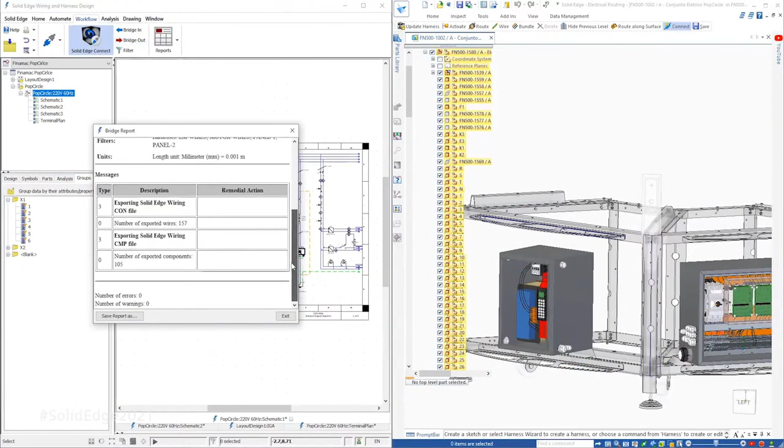Electrical design: enable fast, accurate 2D layout of industrial control panels with new cabinet design capabilities.

Simulation: optimize and validate designs with tighter integration between flow and structural simulation.

Manufacturing: speed up NC programming with a searchable post-processor database, new fast roughing, and adaptive milling.

Technical publications: produce high-quality documents and illustrations faster and directly from your 3D models.

Data management: take control of your data, saving time and money with rapid concept modeling and shape search capabilities. Cloud-based collaboration: harness the cloud to edit and share CAD files and much more.

And there's so much more. Our beta customers are calling this the best Solid Edge release in years. We can't wait to share all of the details with you, so get ready to experience Solid Edge 2021.

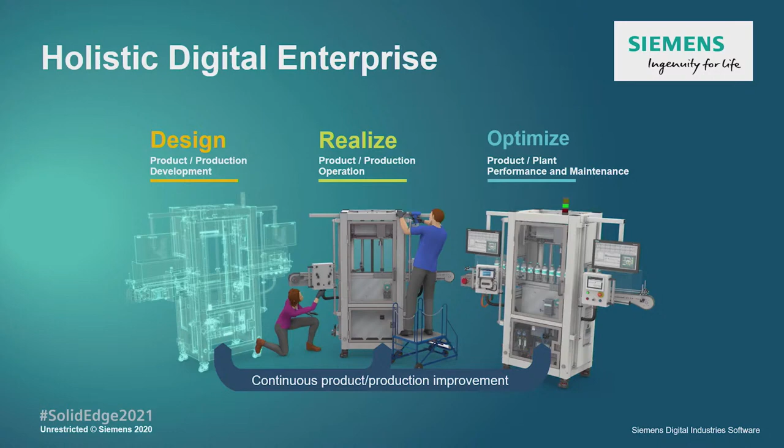But what's happening is that these worlds are collapsing. Design, manufacture, optimizing, it's all pulling tightly together. So you have to think of the digital twin not so much as just a CAD digital twin, but also a manufacturing digital twin, taking data from the field in a tight closed loop and bringing it back to design and manufacture to make your products better.

And this starts with Xcelerator. Design, realize, optimize, whether it's electronics, mechanical, collaborating with others, simulation, IoT, operations, it's all there for you.

And it starts with the Solid Edge portfolio. So it's very important to understand that Solid Edge is so much more than a CAD system. Sure, it has the best mechanical design in the marketplace, but what about the rest of the things that you need to do as a business?

Electrical design, simulation, manufacturing, all part of the Solid Edge portfolio. Technical publications, data management, regardless of how small or how large you are, and now also cloud-based collaboration as well.

And I'm really pleased to announce that we're bringing this not only to commercial customers, but also to students and startups. So the full portfolio of Solid Edge is available to both of these constituencies. Rather than being just MCAD, we have the ability to have MCAD, electronics, technical publications, all available completely free for students and for startups.

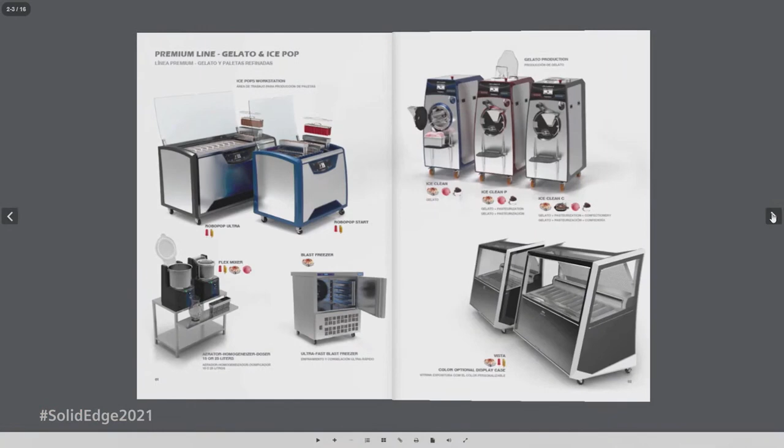If we take a look through their catalog, we can see all sorts of things: ice cream making machines, popsicle making machines, chocolate display cases, ice pop machines, mixture prep, all beautiful designs. The most amazing thing about this to me, however, is that none of this is real, what you're seeing. This is all digital twins. Every picture you see here is straight from Solid Edge, rendered, and into their catalog. So you're really seeing the full realization of the digital twin here with Finamac.

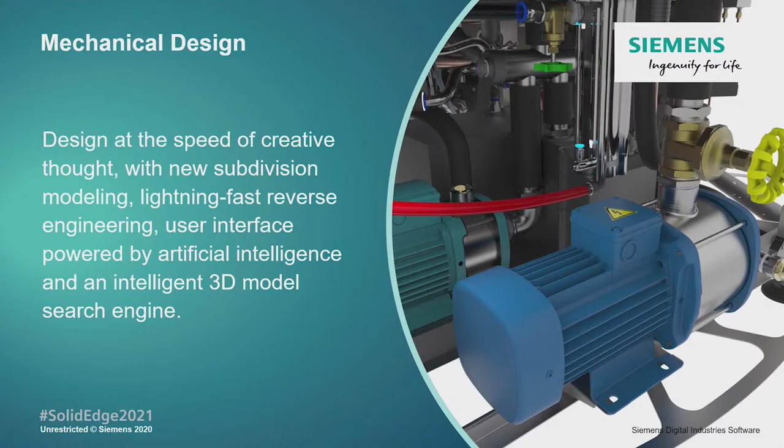So let's start with mechanical design, the core of what you do. New subdivision modeling techniques, very fast reverse engineering, and some new artificial intelligence capability I think you'll really like. Also an intelligent 3D model search engine. Quite a lot to see here just in this first section. So let's go through them one by one.

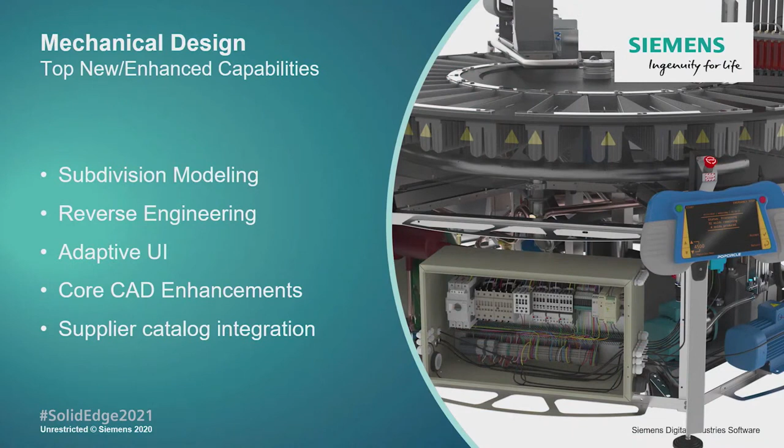Subdivision modeling, reverse engineering, adaptive UI, core CAD, the stuff you do daily, and supplier catalog integration. These are just a few of the things that we're highlighting today. There's a ton of new stuff in Solid Edge 2021 that I think you'll really enjoy, and it'll be really productive for your company.

Let's start with subdivision modeling. This is an amazing technology that allows anyone to create beautiful shapes. In the past, this was really the domain of a specialist—NURBS and surfacing and all these complicated things. Now anyone can create beautiful shapes.

Let's take a look at that with Oliver. Thanks, Dan. So let's jump into the Finamac machine and take a look at subdivision modeling. Here what we're going to do is design the portable controller. As Dan said, subdivision modeling is all about enabling you to develop distinctive organic shaped products, but without the need for expert knowledge. So if you're not the best at surface modeling, for example, here's your chance to shine. We'll start here with industrial design sketches as a guide, and subdivision modeling can be simplified to three steps.

The initial shape, a control cage to push and pull, and then blend options. We started here with a box shape and pushed out the lower portion using the control cage. A split operation can be used to subdivide the control cage, which in turn gives more control over the shape of the body. And the control cage can then be adjusted.

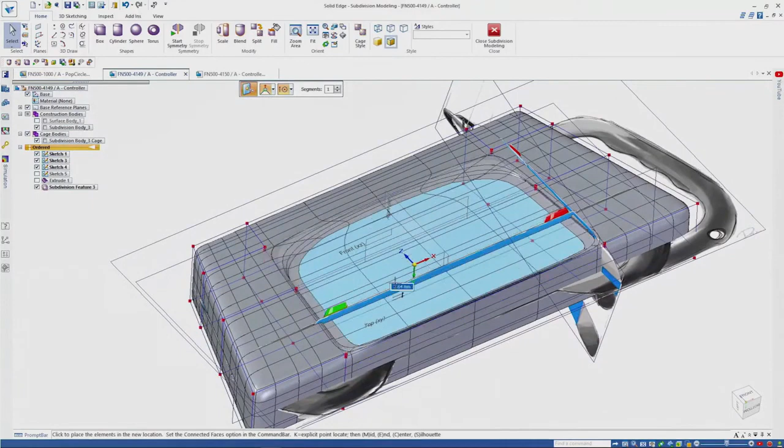Here we can accommodate room for the central area where we need the controller screen. A simple lift operation adds the necessary faces to the model. And then, importantly, this blend function can be used to control how sharp or smooth certain edges are.

While many expect to see only smooth blend options, that's not the case in Solid Edge. Here you can choose sharp blends wherever you like. Then to create the cutout for the screen, a series of similar push and pull techniques can be used to easily get the desired result.

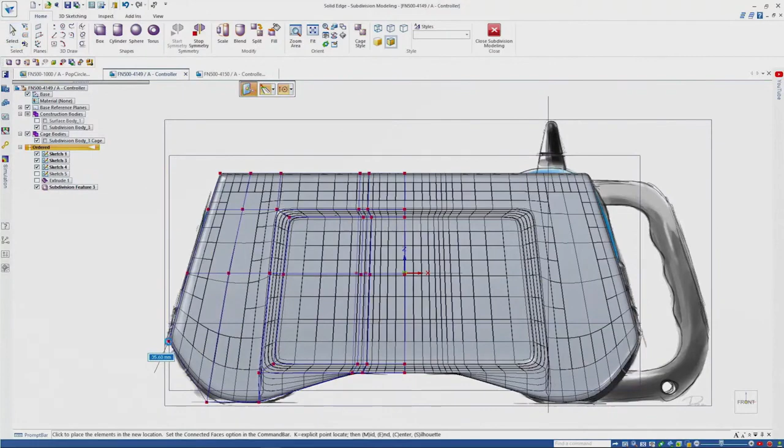Now, many parts are designed symmetrically, especially in the consumer space. To achieve this, we can simply define the symmetry plane, then any edits made on one side of the cage are reflected on the opposite side, as you can see here. And those of you who use synchronous technology in Solid Edge will be familiar with the steering wheel, and it's equally at home here to manipulate this organic shape.

For the notch at the top of the part, a simple move face operation creates the geometry that we need here. And to help keep track of what edges we've blended, the value of each of those blends can be shown at any time for every edge and vertex. That's shown here.

Now we need to create the handle on the right-hand side of the Fealinx controller. I'm not going to cheat here by pulling out something pre-created. We're going to do this live just to see how easy yet powerful this technology is.

Same as before, grab an initial shape. Here we'll extend its form and then use the control cage to push and pull into shape, followed by some blend control, of course, for the finger grips.

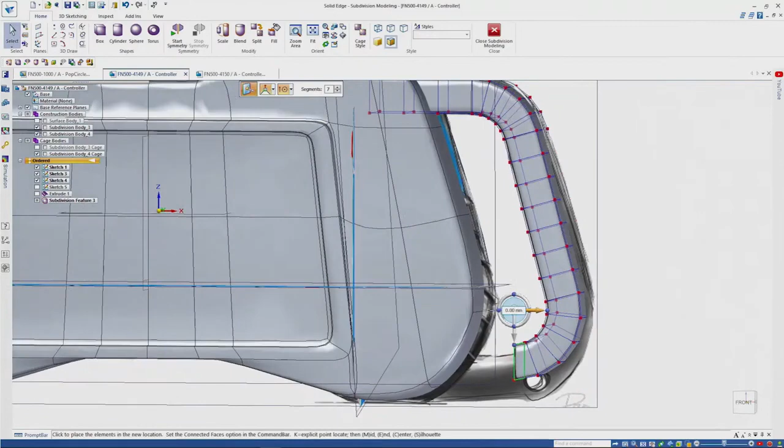Nice and easy, done. Importantly, traditional solid and surface modeling techniques can be integrated with subdivision modeling. Here we can use an existing surface to split the subdivision geometry and then thicken the result to create the raised portion of the handle. And of course you can go on to add further details using more traditional modeling methods. But just look how easy that was.

Something that would have taken traditionally hours, if not days. But here in Solid Edge 2021, we're talking minutes.

Back to you, Dan. Thanks, Ollie. I tell you, I've been around the industry a long time, and I've seen what it takes to do that kind of modeling—literally days to do a type of model like that. And to see that done so quickly live in front of us, it's really, truly amazing, even to an industry veteran like me.

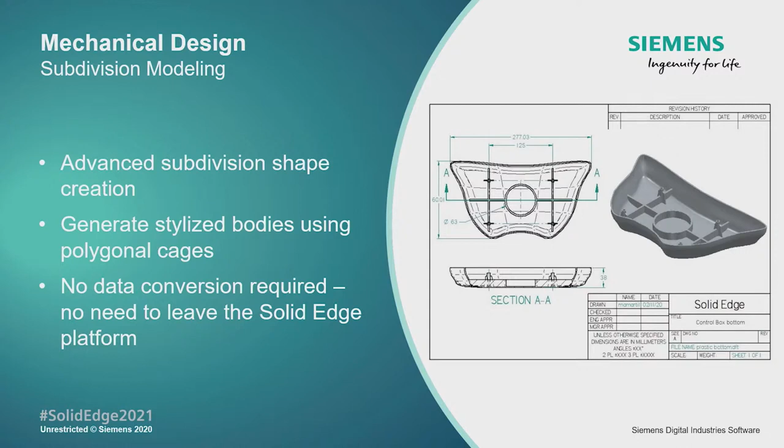So what you see is it's really easy to create those shapes, right? And you use the polygonal cage. It takes a little bit to get the hang of it, but once you get the hang of it, it goes really, really fast. The great thing about it is it's right in Solid Edge. It's built in. There's no specialized tools, no other products to buy. Available to you in Solid Edge 2021.

We're seeing some great feedback from customers around this. For example, Jason English at Ditch Witch. Ditch Witch, of course, makes earth-moving equipment and ditch digging equipment. But they are bringing more and more stylized shapes. They want to see what their industrial designers can do with a new technology like this. I'm excited to see as well.

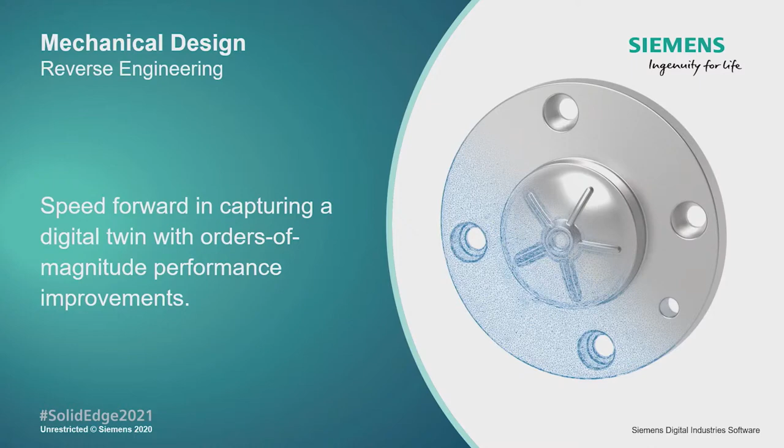Next up is reverse engineering. We introduced reverse engineering a couple years ago, and we've been continuing to invest in it, making it faster, adding new features to it. I think you'll be really pleased with what we have in Solid Edge 2021. Let's take a look with Ollie.

Yeah, thanks Dan. So we'll jump back into Solid Edge 2021 and take a look at one of the recent additions to Solid Edge's reverse engineering toolset, deviation analysis. This allows you to measure the accuracy between an original scan and the resulting reverse engineered model, or even compare scans. The result plot color codes deviation for easy interpretation. Red means our test body exceeds the reference body, and dark blue depicts negative distances. On-screen callouts identify minimum and maximum deviation, and you can copy and paste any of the data for later reporting. Settings such as deviation range and result decimal places can be adjusted at any time, taking just seconds for the model to recompute. Back to you, Dan.

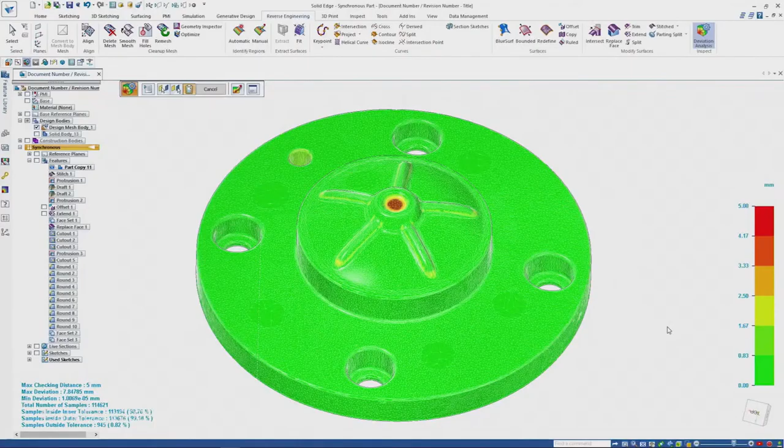All right, thanks Ollie. Some great new capability there in reverse engineering. Of course, the deviation analysis, really those models that you're taking from the real world and creating a physical digital twin, how far do they deviate from the real world product? Easy to tell with deviation analysis. And importantly, it's really fast now. So things that used to take minutes now take seconds.

Next up is adaptive UI. This is a great new technology I'm really excited to bring to you guys. It uses artificial intelligence to predict what you'll do next. How does it do that? Well, it looks at what you've been doing in the past, and it looks at your patterns, and then it figures out what you might do next and presents those options to you. It's really groundbreaking stuff, so let's take a look.

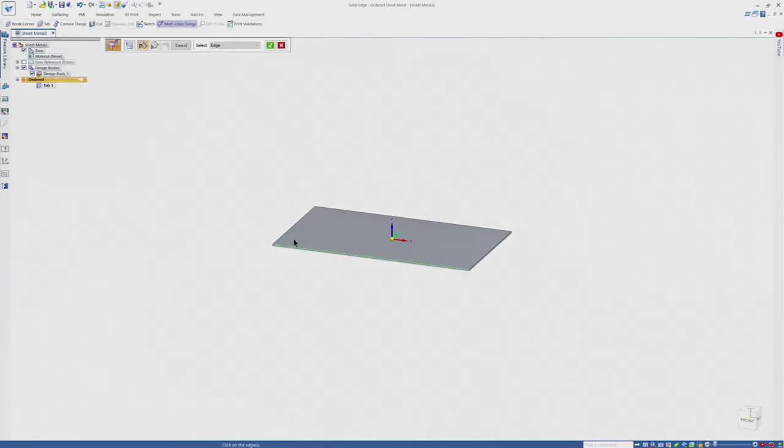Very cool indeed. So let's jump into Solid Edge once more. And what you need to do here is keep your eyes on the top left of the screen. Solid Edge 2021 includes an artificial intelligence-based assistant in the user interface up here to predict the next commands you need based on what it is you're doing and where you are in a design. So for the Fealinx machine, there's lots of sheet metal work, and Solid Edge 2021 has learned that from the design engineer, and rather than presenting tools that are commonly used across the industry, which would be good, it's presenting tools commonly used to the individual, which is excellent.

That's right, Solid Edge 2021 is now individually tailored to you, and what's more, it will continue to learn from you and dynamically improve how it holds your hand through your day-to-day work. And it's really interesting to watch, dynamically presenting the next selection of tools, even across environments, as we go from sheet metal to sketch and back, presenting those specific commands. And I said at the start to keep your eyes at the top left of the screen. Notice that it's just one toolbar. This means you can remove the other toolbars to maximize your workspace. You have what you need right here, ready when you are.

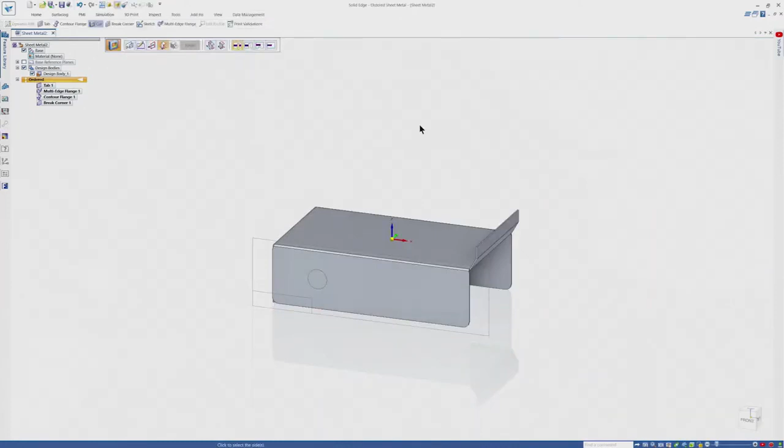Back to you, Dan. All right, thanks, Ollie. That was great. As you saw, we're harnessing the power of artificial intelligence, and you see how it can really be applied to your daily work. So it's personalized to you. It actually learns from you. What it does after the first day of usage versus what it does after a week of usage will be a little different because it's learned from you. It's a little bit smarter.

And the great thing about it is, though, you can also share that with others in your company. So even though maybe your work isn't the same as other companies, within your work you may have similar things that people do. You can give them a head start on learning by sharing your piece with them.

In the area of core CAD enhancements, we've had a lot of work going on. There's no way we can cover the depth and breadth of Solid Edge 2021 in this short update, but I want to show you a few things that I think will be really valuable in day-to-day work, the stuff you do every day. Ollie, let's take a look.

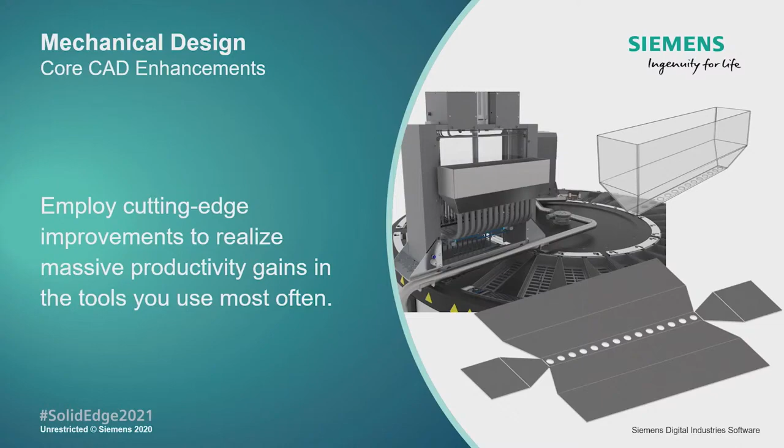Great, thanks Dan. Let's jump back into Solid Edge one more time. Here is the Finamac popsicle machine. By the way, the actual name of this machine is Pop Circle. Pop Circle for popsicles, I like it.

First off, we're using large assembly mode here to make the most of our computer's resources and keep things performing as we expect. You can see that top left. And there's more to help with performance here also.

It's common practice for suppliers to provide a 3D file of purchased items, such as the piston assembly you can see, and using the new internal components option on import, all separate parts are contained within one single assembly file, with no parts written to disk. This enables faster import times, especially on larger data sets.

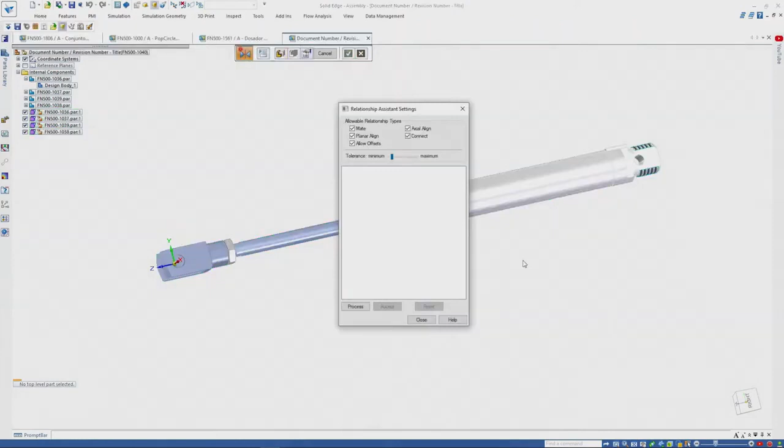Even though these parts are all internal, we can still carry out many traditional operations, such as taking measurements and analyzing mechanisms. Here we can see the correct operation of the piston assembly with its internal components. Furthermore, you can then assemble the item in a way it would work if it were a regular assembly. All in all, this provides increased performance and lower consumption of system memory.

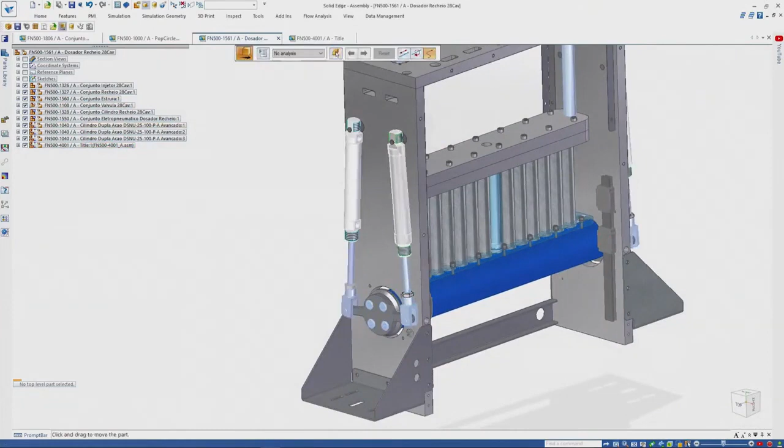Next up, reusing designs is now even easier. When copying and pasting multiple parts and assemblies between designs, existing relationships are automatically captured and reused in the target assembly. A step-by-step process guides you through the operations to add the external relationships required to fully position the parts. All internal relationships come along for the ride. This significantly reduces the time for these common operations.

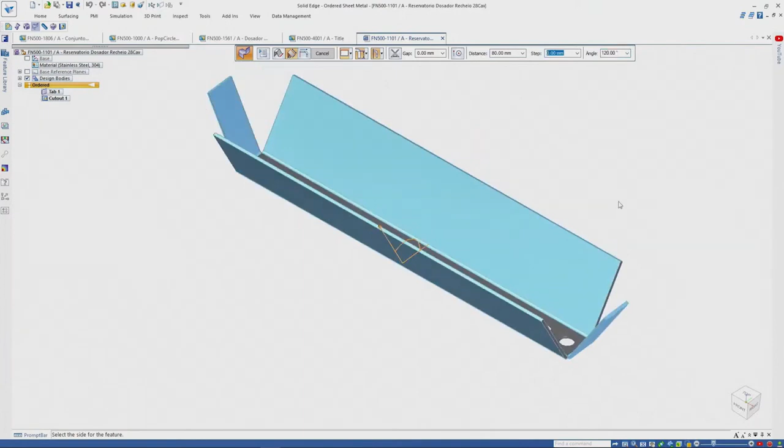Next up, let's step into sheet metal, where we've got a new multi-edge flange command that speeds the process for designing sheet metal parts. Multiple edges can be selected at the same time, angles can be defined, and miters automatically added. It's as simple as picking the edges and then pushing or pulling. In addition, partial or centered flanges can be defined, and trim options make light work of tasks that would normally require multiple operations, even with offset or gap distances as required.

These sheet metal enhancements, along with many others, increase productivity and efficiency by being able to design parts faster and easier.

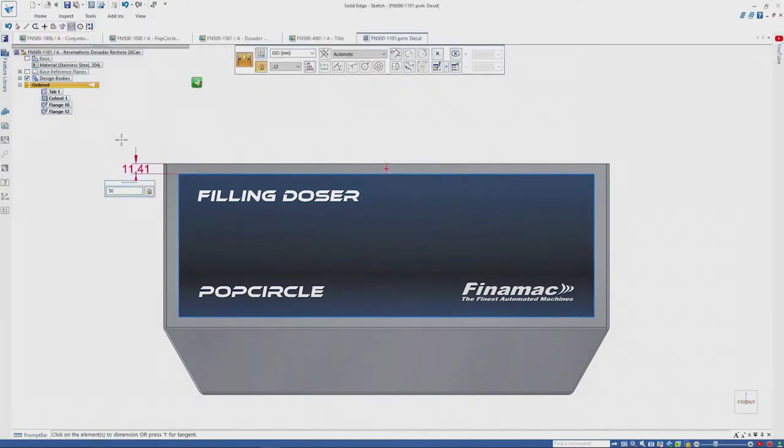Next up, and also new in Solid Edge 2021, is a new Decal Command. This makes it quick and easy to add labels and images to parts. You simply select the desired image, define the desired size, and then position it accurately using regular sketch relationships and dimensions. The decal can span multiple faces, as we see here. However, changing the position of it is as simple as modifying the dimensions or relationships that are assigned.

Solid Edge 2021 also sees enhancements in frame design. We'll move to that next.

Here, what we're going to do is place a cross frame which has coping applied so that it matches the circular cross-section of the vertical frame. Now we can specify a weld gap between two frames, and this is especially important in generating an accurate cut length of welded frames in our parts list.

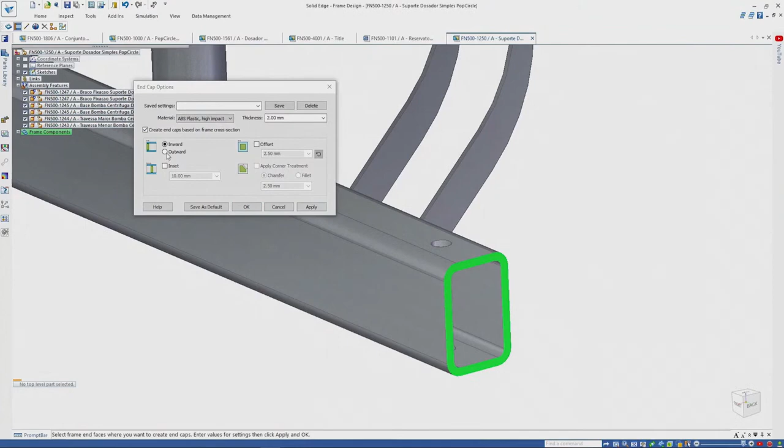Also new in Solid Edge 2021 is the end caps command, which allows quick definition of these types of parts within a frame. This single command provides a wide range of options. Simply select the frame cross-section, choose the material, and specify the type. You can choose from different types like inward or outward, and even define offsets or have chamfered corners. The end caps are then reflected in the bill of materials, eliminating additional work for the user.

Thanks, Ollie. Some truly great stuff in there, and as I say, just a little bit of a preview. But large assembly performance, our customers keep making larger and larger assemblies all the time. Starting with a smaller assembly, getting bigger, suddenly they're doing a machine, next thing you know, they're doing a small factory. And we're keeping up with that and continuing to add capability to go bigger and bigger.

Internal components performance, this is a really exciting feature.

Today it's used for importing parts, as Ollie was talking about—the ability to import an engine that has 300 parts and just jam it all into one assembly, not having to worry about all those individual part files because honestly, you really don't care about them. Perhaps they come from a supplier. But that internal components technology is also going to allow us to leverage that in the future and do some more exciting things in coming releases.

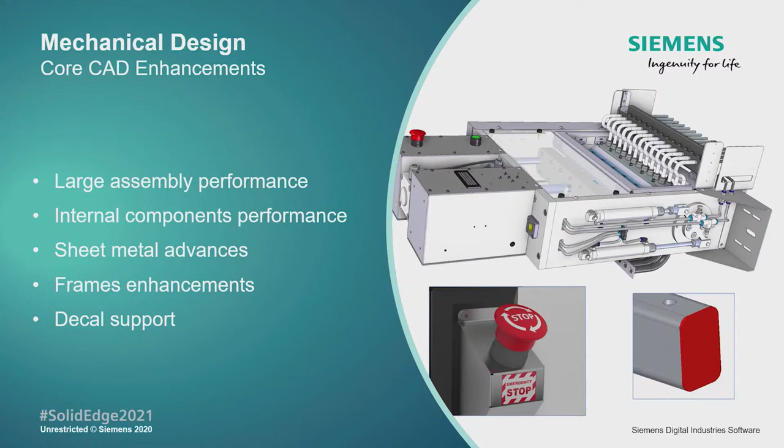The sheet metal advances are really amazing. I know a lot of you are Solid Edge customers because of sheet metal—we're the sheet metal guys and continue to be so. The new multi-flange with the ability to auto-trim against each other is unique in the industry; it's actually patent pending right now. Frames, we continue to build that out—a lot of machinery design customers building frames. End caps and weld gaps provide great capability there. And decals, as you saw, it's not just decals on a flat surface, it's curved surfaces, across multiple surfaces. Really nice implementation.

We see our customers really enjoying the Solid Edge 2021 release. For example, Luca Carminati at CMS has been working with the new sheet metal. They do a lot of sheet metal at CMS, and this multi-flange and auto-trimming is going to save them a bunch of time.

And what about supplier catalogs? You're often getting different parts and catalog data from your suppliers—different people make different products that you incorporate into your product. What if it was easy to find, in a bunch of different ways, and be able to utilize it in your design? It's going to save you a whole bunch of time. So let's take a look at that, Ollie.

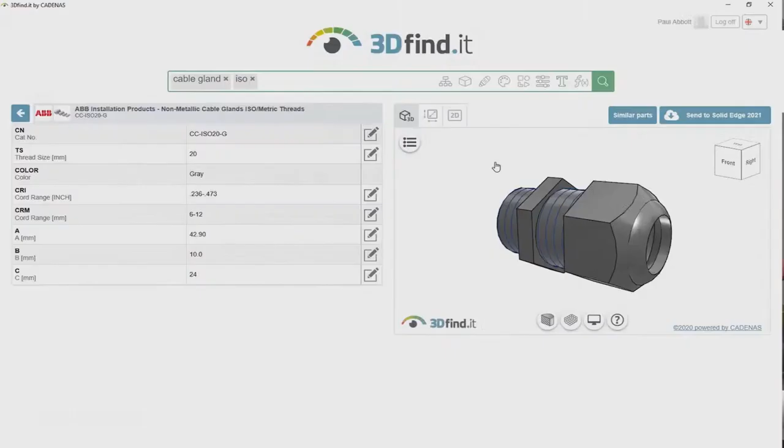Yeah, indeed, that's all included in Solid Edge 2021. This is 3Dfind.it for Solid Edge, powered by Cadenas, the latest search engine for mechanical, electrical, and electronic engineering. Here we're searching for a cable gland using text, narrowing down the search by filtering supplier, and we can even add additional search items, in this case to filter for ISO standard. You can even search using 3D geometry, sketches, and much more. We can visualize a 3D model for the part, or even its 2D drawing, select the relevant individual parameters as you saw earlier, and then a single click brings it right into Solid Edge, ready to go. Back to you, Dan.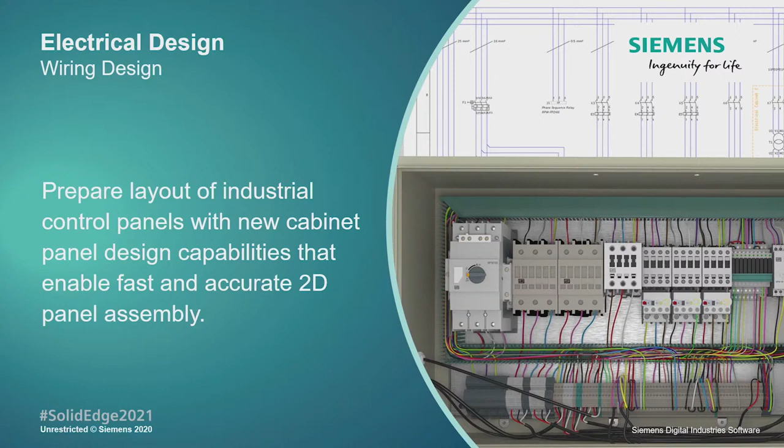So there's a lot to talk about in electrical, and first is wiring design. There's a really important thing coming here in Solid Edge 2021, and that's cabinet and panel design. It's a whole different thing when you're wiring a tractor or a car than when you're creating industrial control panels and cabinets that go into the machines you design. Full complement of tools there now. Okay, let's take a look. Yes, sir.

So here we are in Solid Edge wiring and harness design. We're going to add to the existing electrical design work for the Finamac machine by laying out the machine's control panel. Solid Edge 2021 has new cabinet panel capabilities that allow us to reuse the schematic intelligence of Solid Edge to generate the panel layout.

Placing the correctly sized cabinet based on our specs, we can add additional items such as backplates, channels, mounts and other hardware. We also need some wiring ducts, so here we'll place a series of channels. Dynamic dimensions provide accurate feedback, and industry standard profiles are available.

Using the mount command, we can add the necessary DIN rails to which we'll attach electrical components. Again, accessing the properties allows us to choose from industry standard sizes and profiles. Adding some dimensions to the mounting plate, as well as the channels and rails, will help document their positions.

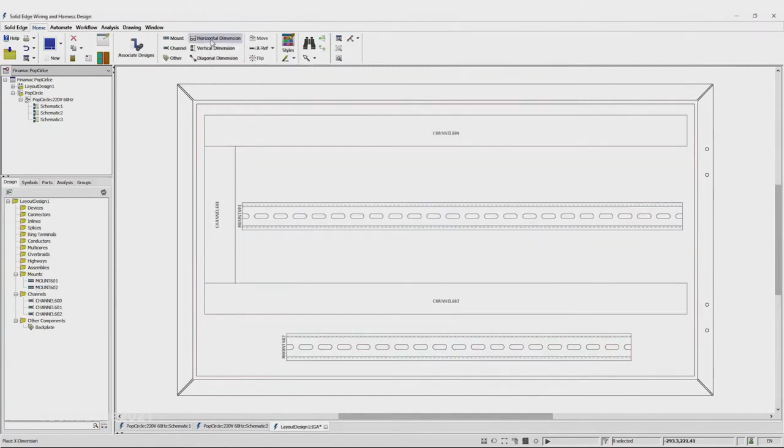Associating the new layout design to the schematic allows us to place the relevant logical electrical components. Placing devices is simple, and there are many ways in which this can be achieved. We can place single objects or multiple objects at the same time. Shortcut options allow control over snap points, rotation angle, the order of placement, and much more, all of which are dynamically previewed during this placement process.

The last few devices are being placed onto the top and bottom rails. Yep, nice and quick and easy.

And of course, what's going on in the background and what's automatically being updated is a bill of materials as we've been adding these devices to the layout design. And the bill of material IDs can then be easily generated with balloons.

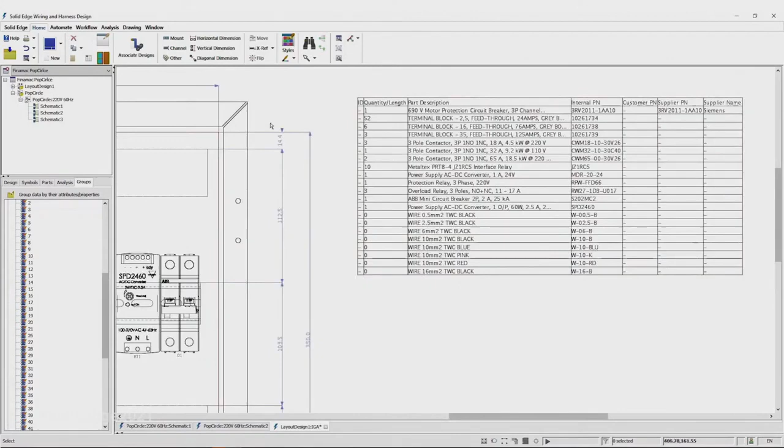Finally, for the panel is the terminal plan, which assists in the assembly and wiring of the terminal strips. The fully associative terminal plan tables are automatically generated, documenting the terminal blocks along with their specific symbol, physical sequence in the strip, and details of where the wires terminate at both ends of each block.

Now that the electrical design and documentation is complete, we wish to share this information with our MCAD colleagues. And this is where connected mode comes in. It makes it really easy for the ECAD and MCAD worlds to come together and collaborate.

So here we're switching to Solid Edge 3D CAD. We have connected mode on, and you can see the existing wiring details that have already been added to the design. We can then cross-highlight components between the two disciplines.

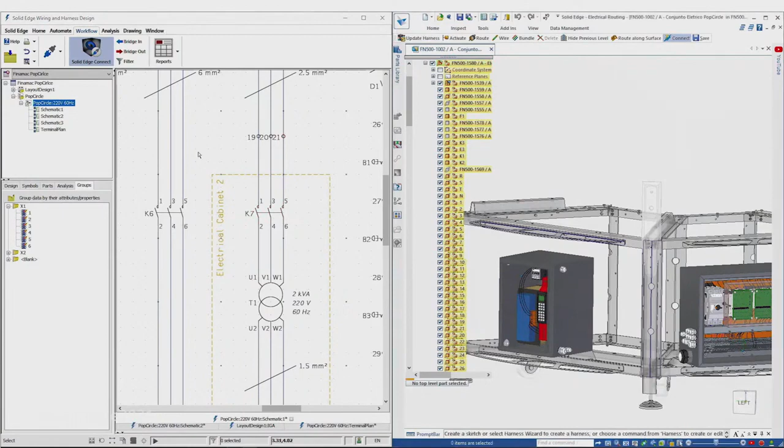Now we're going to bridge in some final conductors to connect the two cabinets together. And then we can bundle these wires together. And to keep the bundle neatly organised within the assembly, we're going to use the new route along a surface command, which provides a highly efficient way of routing the bundle path around the contours of this frame.

All we need to do is simply pick the bundle to be routed, select the faces of the geometry the bundle needs to follow, and then plot some points to define the path of this bundle, to route the ends of the bundle through each of the glands on the respective cabinets. Awesome, done.

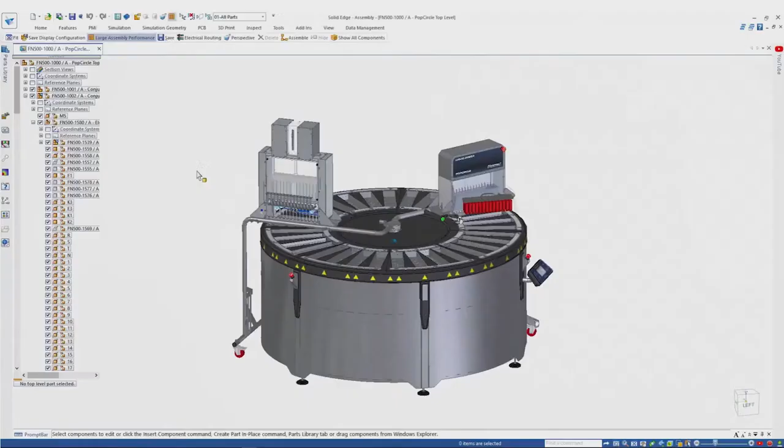All right, thanks, Ollie. I will tell you, I am not an electrical engineer. I don't do electrical, but just watching that to me is quite amazing. The amount of productivity you have in terms of laying out the cabinets and panels, really remarkable.

So if you're doing something that's using more manual techniques, you're going to find this is going to add amazing productivity to your day. And what you saw there, first of all, is that customizable, table-based interface to do the device snapping to rails and so on. There's also, we didn't get a chance to look at it, but there's also an auto routing capability on your schematics that'll save you a lot of time. And of course, this is now all upward compatible to the Mentor line of products.

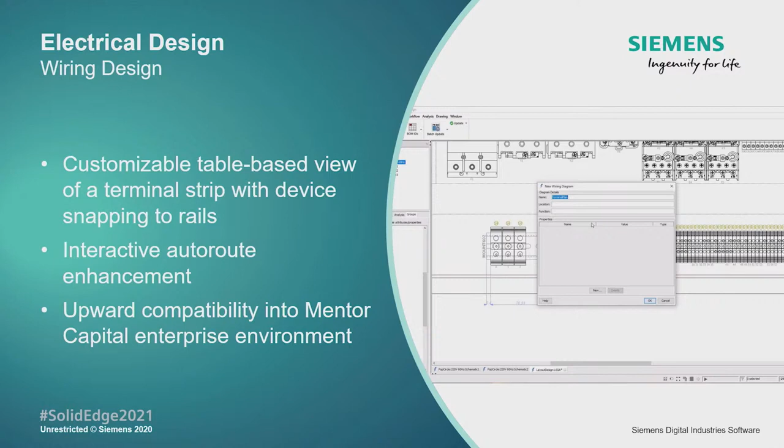You got to see a little brief there of routing along irregular geometry. It can be even a sculpted shape, maybe something you did in subdivision surfaces. We also have that connected mode now extended, so it's not only working with Solid Edge electrical, but it's also working with Capital. And finally, we have integration to more third-party products as well.

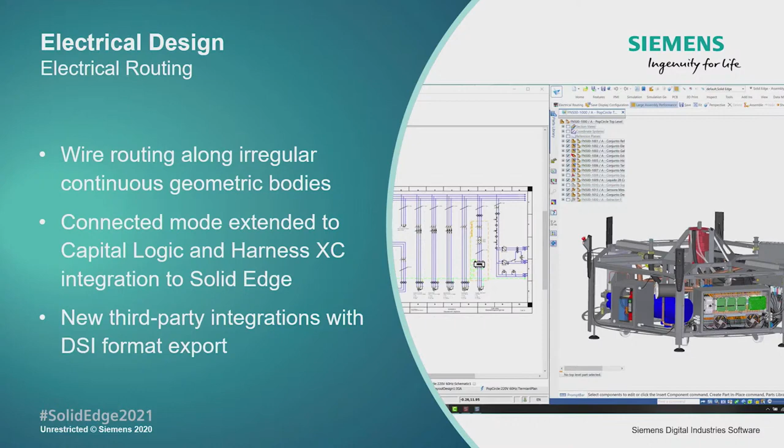In the area of harness design, to be clear, I'm not talking about the 3D that mechanical engineers might think of. Harness design is also something you do in 2D—how are you going to lay out the harness for production? You have the ability to visualize that in Teamcenter as well as tie it back to requirements. It enables tracing to the requirements themselves, and allows interactive auto routing for the full signal path.

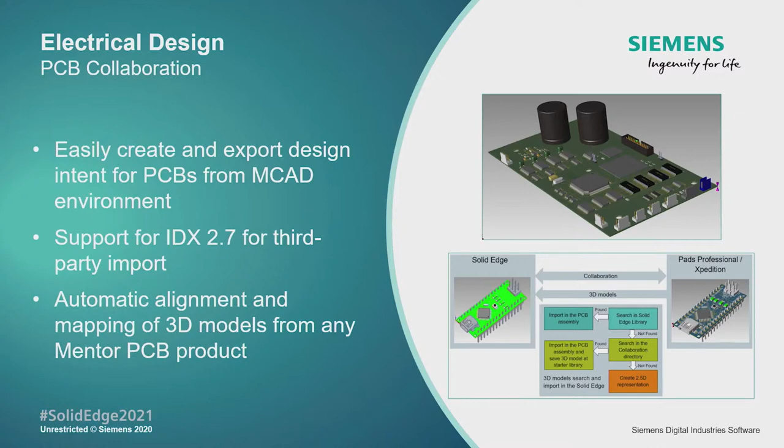In the area of PCB, some great stuff as well. It's all about that collaboration between electrical and mechanical, and the ability to bring those things back and forth, maybe propose a design change and accept or reject it. That's all supported through the IDX 2.7 format, as well as the mapping of 3D models between the Xpedition product from Mentor and the Solid Edge product.

We're seeing a lot of traction here with people adopting this product. From our portfolio, Solid Edge is more than mechanical—mechanical and electrical with the wiring, the harness, and so on—and you see how they work together. Folks like Matthew Fresco at WashTech are taking advantage of this already. It's a true digital twin, not just a CAD mechanical digital twin. It's a digital twin including electrical, and it really solves a bunch of problems normally found in the field. I think you'll find this is a great area to expand into.

Next up is simulation—lots going on there. We have products for stress analysis, modes and vibrations, all sorts of different things, flow analysis. You're going to see some great integration between those two products happening in Solid Edge 2021. Let's take a look, Ollie?

Yeah, let's jump back into Solid Edge and we'll take a look. So back into the PopCircle machine.

First off, we're going to look at Simcenter FLOEFD for Solid Edge, which features new capabilities and modules for electronics cooling applications. The new package creator specializes in the rapid creation of accurate thermal models of electronic packages with correct definition of chip layers and solder balls on the chips.

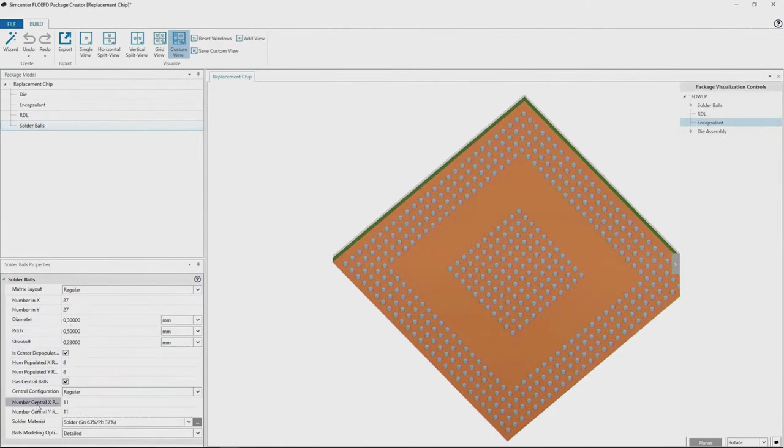Here we're going to see clearly the thermal effect on this PCB board and then in turn its effect on the overall electronic enclosure. Looking at the flow trajectories, which we can turn on, around the fan area, this shows how the fan swirls the air and pushes it into the side of the enclosure to cool it.

We can also see how the fan is performing on the fan curve, showing the operating point of the individual fans based on the fan curve data from the fan manufacturer. ISO surfaces are another way of illustrating where airflow is going and showing the velocity as a volume plot.

In addition, Solid Edge 2021 now has the ability to apply the results from a computational fluid dynamics study, which we've just seen, as an input to Solid Edge's structural thermal simulation studies.

Focusing on the tank containing the liquid bath that freezes the popsicles and looking at the results of this thermal flow study, we can see how the cooling liquid interacts with the assembly. These results can then be sent to Solid Edge's structural simulation by using the export results command.

Now let's get the structural analysis set up. Also new for Solid Edge 2021 is the ability to suppress or remove any components directly from the simulation pathfinder, making it easy to test the design on a subset of the study geometry.

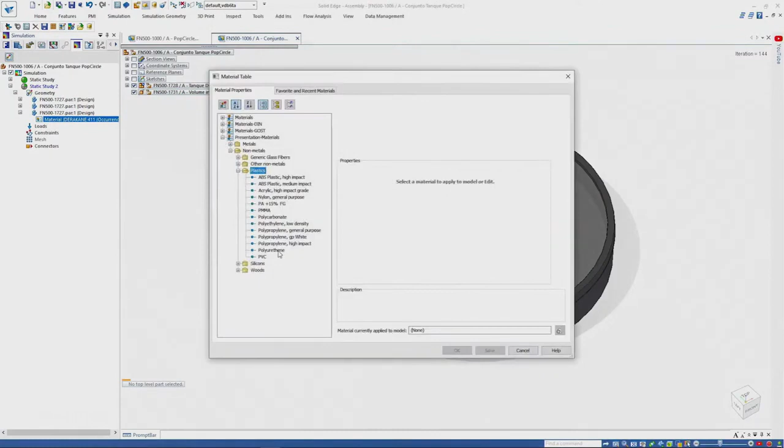When defining the material for the insulating core, another new feature is the ability to highlight key material properties required for the study we're attempting to solve, as can be seen here by the green colour coding. This makes it easy to ensure we have appropriate properties defined for an accurate study.

Our last step before solving our structural study is to import FLOEFD pressure or thermal results. These are automatically applied directly to the correct bodies and also the faces in the study. And the result—we can see all the pressure from the cooling liquid and where it's causing the highest areas of stress on our design.

And it doesn't stop there for new capabilities in Solid Edge 2021. Also new is the ability to probe edges, ultimately saving us time from having to select each individual node. Cool, back to you, Dan.

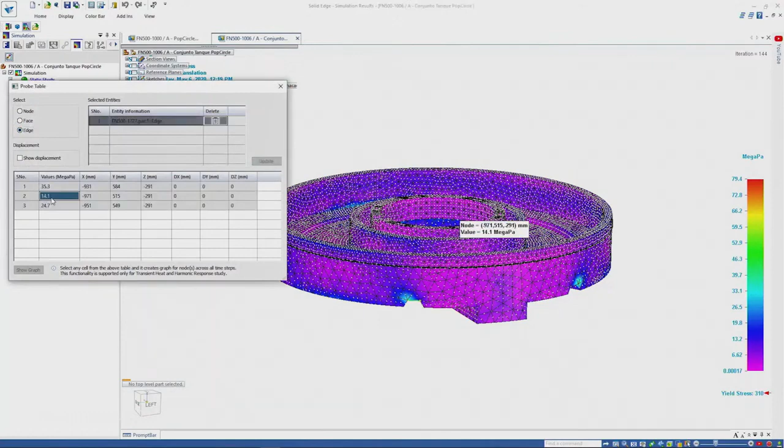Thanks, Ollie. Like I say, I've been in this industry a long time and I'm still amazed by some things I see. The stuff around flow simulation, the integration of that with the stress simulation, it's just amazing stuff.

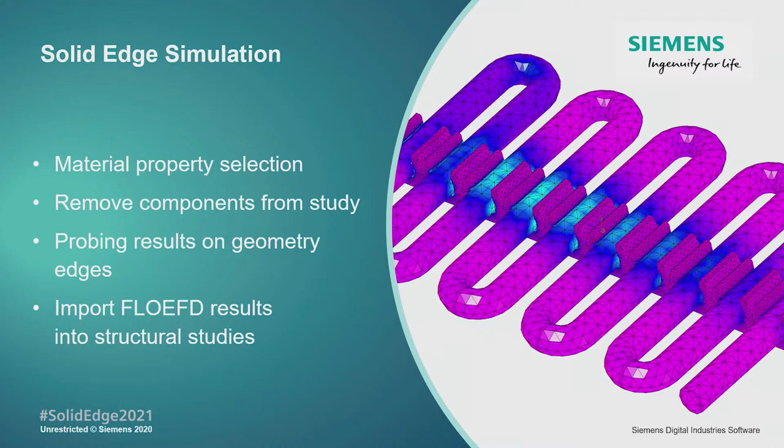So we continue to enhance Solid Edge simulation in many ways, improving the interaction with materials, making it easier to remove components from the study, being able to probe the geometry more easily. But really that ability to tie flow and structural together is really quite amazing.

So we're able to take the information from flow and read that directly into Solid Edge for, let's say, a stress analysis. In addition to that, you saw the new electronics cooling center, a full suite of capability for electronics cooling, very deep.

The other thing we've added is something called BCI-ROM, which means probably nothing to you, but what it should mean to you is months to minutes. This is, again, amazing technology. A study that literally would have taken 6 weeks of CPU time can be done in 3 minutes, and in those 3 minutes, you'll be within 5% of what those 6 weeks would have given you. Truly amazing stuff coming out of the team, and I invite you to take a look at it.

Next up is manufacturing. Accelerating your product development, whether it's additive manufacturing or subtractive manufacturing, we have the tools for you.

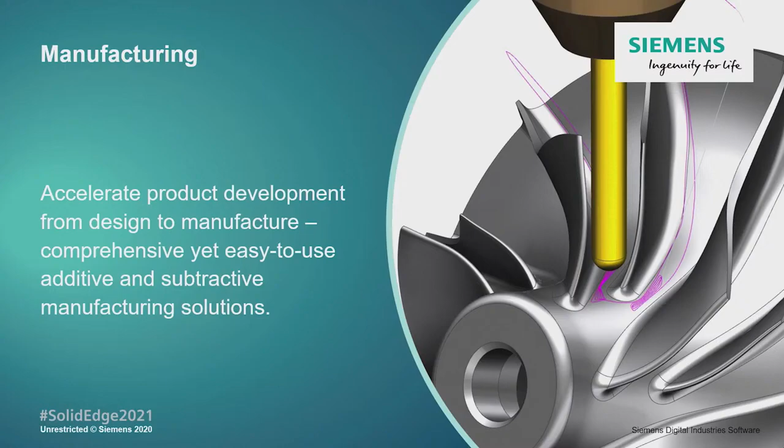So let's jump into Solid Edge CAM Pro. New in 2021 is integration with PostHub, an online library of post-processors that makes integration with your machinery easy and quick. With new posts added regularly, PostHub is searchable with filters for machine type, manufacturer, controller type, and kinematic configuration. Once the desired post processor has been selected, it can be automatically downloaded and installed, and verifying the post output is nice and simple.

Next up, we're going to take a look at Solid Edge CAM Pro's multi-axis roughing, which is a great tool for quickly removing stock from aerospace parts like the one shown here. Multi-axis roughing uses adaptive roughing technology to machine parts in the most efficient manner.

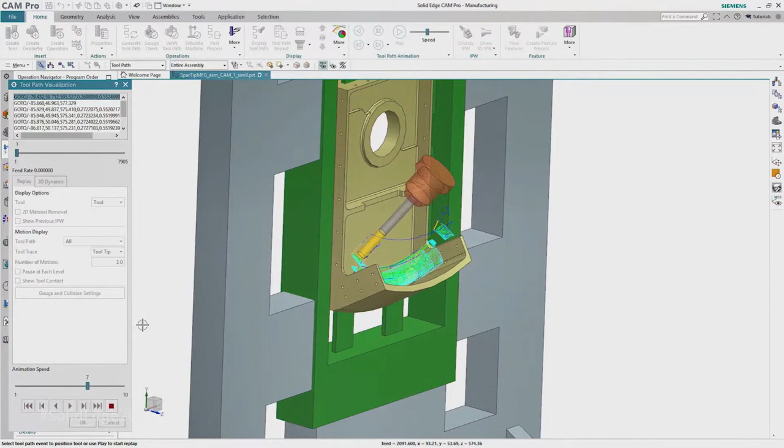Viewing the multi-axis roughing path in replay mode allows visualization of the tool axis tilting as the cutting tool removes the material. The 3D dynamic simulation option shows tool motion and concurrent material removal. Notice how multi-axis roughing efficiently removes material without ever burying the tool in the cut. That's extremely important for efficient machining.

With machining simulation, users can view the actual machine motion, which delivers a really high confidence level and is necessary for complicated multi-axis machining centers. That's what you see here. Solid Edge CAM Pro supports G-code based simulation, meaning the virtual machining center is acting upon the G-code just like the real machine will.

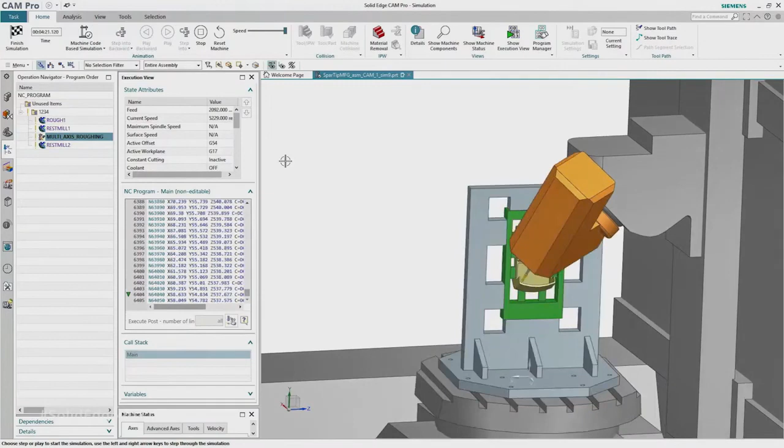All right, good stuff. So we continue to push both additive and subtractive manufacturing forward. You can see the new PostHub library. This has been a thing in industry that's been difficult for people to deal with, getting posts for their machines. Much easier now with the PostHub library. You saw the multi-axis roughing, really state of the art. We've also added some things in additive we didn't get a chance to look at, but better material selection for what you're going to print your part with, and bringing together various additive checkers into one comprehensive additive checker that just makes it a whole lot easier to interact with.

Another part of manufacturing, though, is nesting. A lot of you do sheet metal. We talked about sheet metal earlier, and in fact, the ability to lay those sheet metal parts out in the most efficient way possible. We have the most efficient algorithm in its industry for doing that. I want to talk to you about some of the new enhancements in that area. So let's take a look, Al.

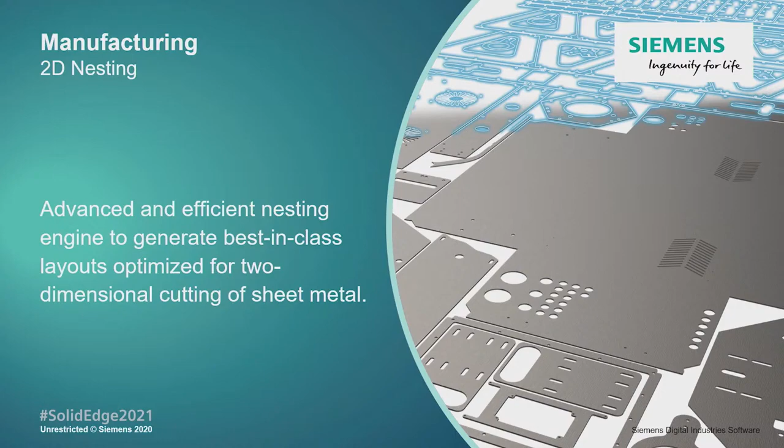Yeah, thanks, Dan. So let's jump back into Solid Edge. And if your machine looks like this, as in consisting largely of sheet metal parts of varying materials and thicknesses, you'll really benefit here.

So, jumping into Solid Edge 2D nesting, you can now search the complete assembly for appropriate sheet metal documents, and it'll automatically sort the parts by material type and thickness as this progresses in. By selecting the material type and then thickness, you can quickly make patterns from multiple jobs, enhancing shop floor efficiency. Flat patterns are then automatically extracted from the parts, saving up valuable time here.

Assembly occurrence counts now automatically define part quantities, while the job multiplier quickly calculates the amounts needed to manufacture multiple machines. Solid Edge 2D nesting supports multiple sheet sizes.

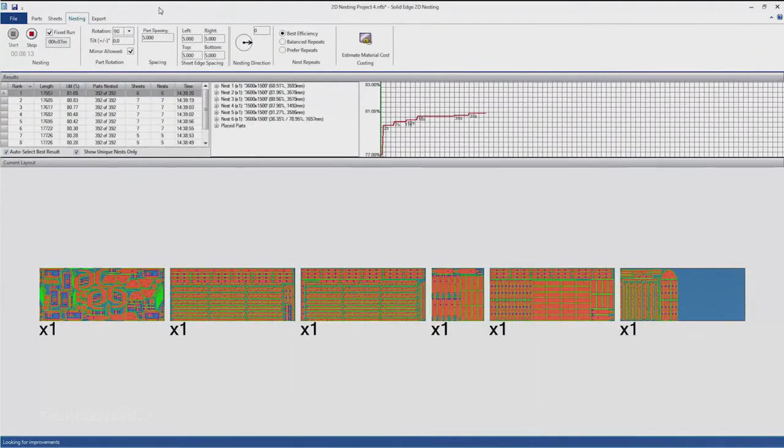Standard sheet sizes are stored in a library, and you can easily define your own custom sizes. Here's Solid Edge 2D nesting doing its thing, finding the most efficient use of material. Savings in material costs alone, gained by the highly efficient algorithm, can quickly offset the software investment.

Last but not least, 2D nesting has a new quick cost estimator. From user-defined costs per square metre or yard, 2D nesting quickly generates the accurate cost of material needed for job cost accounting, quoting and inventory purposes. We can see that being applied here in the software, automatically giving ourselves that estimated material cost. Really nice.

Back to you, Dan. All right, thanks, Al. So 2D nesting, I think, is a great opportunity for many of you doing sheet metal to save a lot of money, honestly. It's a very efficient algorithm, the most efficient in the industry.

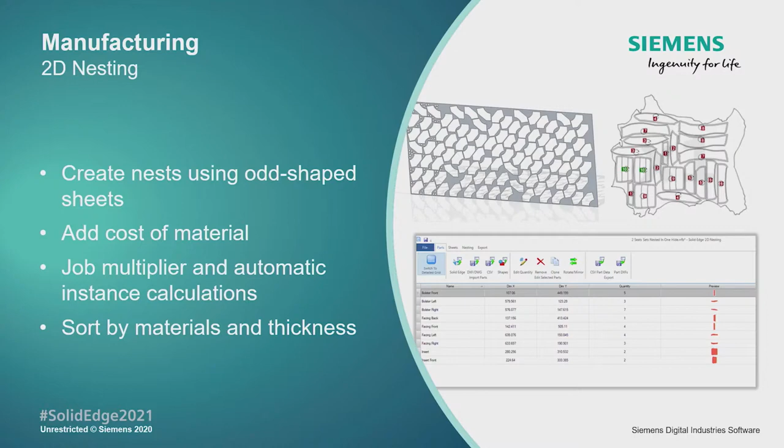Next up is tech pubs. Over the years, you've generated tons of Solid Edge data. What if you could take advantage of that and be able to generate beautiful technical publications super easily? Well, it's faster than ever in Solid Edge 2021.

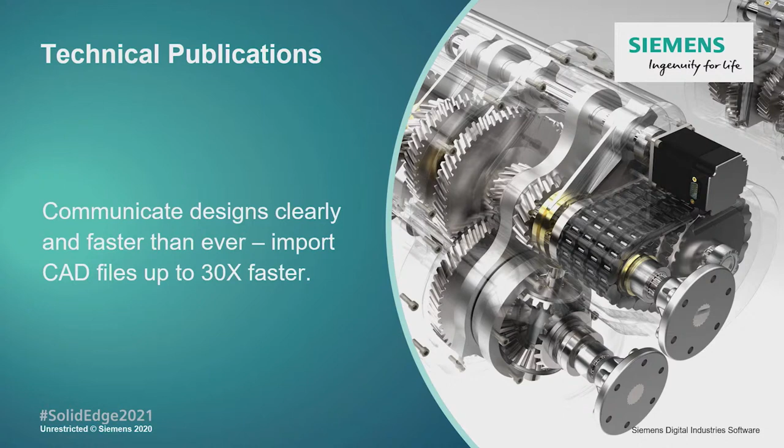Thanks, Dan. So yeah, let's jump back in one more time. Here we're going to put together an interactive maintenance publication, something that can be used on a touchscreen tablet by the maintenance department. A host of new and improved functionalities make it simple to create clear technical publications, be it for manufacturing, installation, or here, maintenance, and it can be interactive content like this, or hard copy paper content too. New selection capabilities in Solid Edge technical publications allow the organisation of groups of parts and subassemblies into named sets.

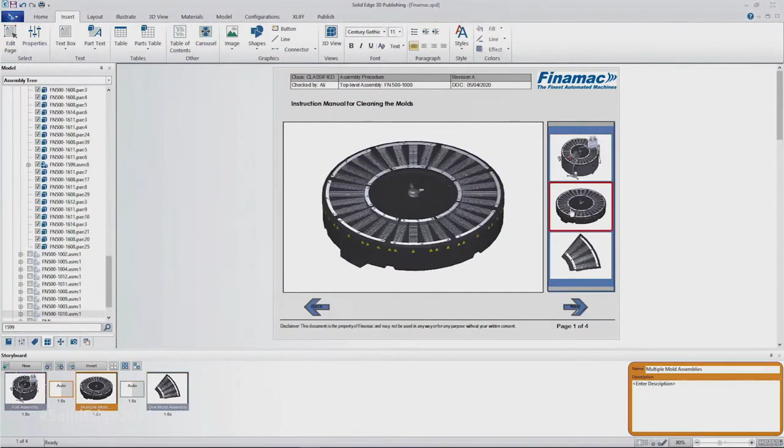This makes it easier and faster to select, show or hide multiple parts at the same time. Here we'll focus on this single mould assembly to build a document that describes the cleaning process. The new view carousel function makes it easy to navigate through illustrations within a storyboard, and creating an interactive view is fast and easy.

Here we can accommodate multiple 3D views on a single page, and selecting a part on the right displays it in the view on the left. The next page includes step-by-step instructions for cleaning the mould assembly.

The best way to visualise this process is to mimic it through an exploded view with dynamic text boxes providing instructions. Adding buttons to step through the process is made quick and easy by using the new manual markup resizing options. Not only can you import all native Solid Edge exploded views, but you can also create custom exploded views within Solid Edge technical publications.

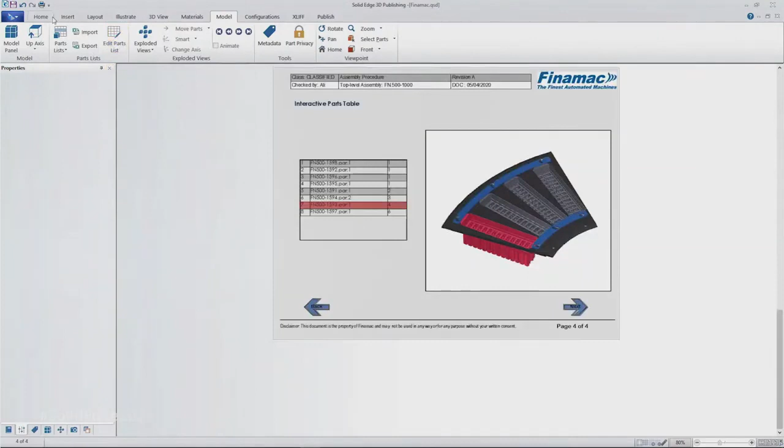Adding an interactive parts list is as simple as drag and drop. The parts table is automatically displayed based on the 3D model's metadata. A new powerful and versatile parts list editor also makes it easy to customize this table. Adding an illustration table allows us to quickly switch between the collapsed and exploded views of the mold assembly. You can see that here.

The project can be published to industry standard formats such as 3D PDF or, in this case, HTML5. The rich interactive documentation can be viewed in any web browser without additional plugins. Also new, 360-degree publishing to get an all-round view of your product. The automated functionality allows for more robust presentation of your designs, a great way to capture images for product and stakeholder meetings.

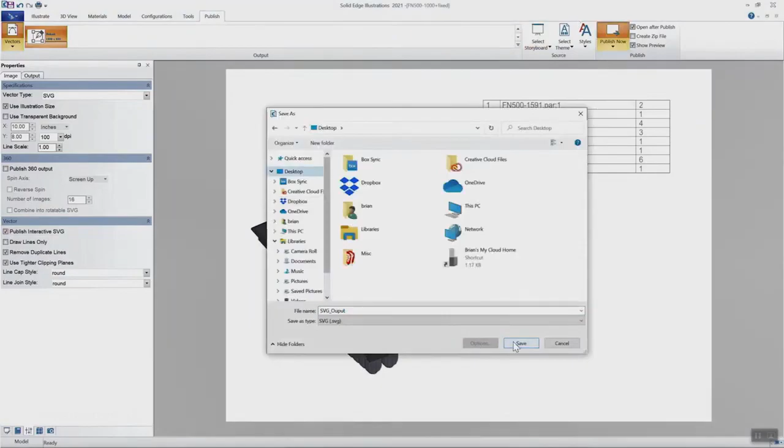Also new, Clickable SVGs, another new feature which allows us to publish an illustration in this interactive SVG format. When a part in the model is selected, the corresponding row in the table will also be highlighted, and vice versa. And furthermore, being SVG, it's beautifully crisp and clear. Back to you, Dan.

Thanks all, looks really good. So the tech pubs, we see that you can take advantage of the data you have today, right? As I said, people have generated literally millions of parts. Some customers have upwards of 15 million parts. The ability to use that in your technical publications directly is very valuable. Faster performance, now integrated with Teamcenter as well. And you saw some of the great new features, the carousel page object, the 360-degree publish. All good new stuff in Solid Edge 2021.

That leads us to data management. You've generated a lot of data, whether you're a company with 2 seats or 200 seats, we have you fully covered with our scalable system. Let's take a look at some of those enhancements now.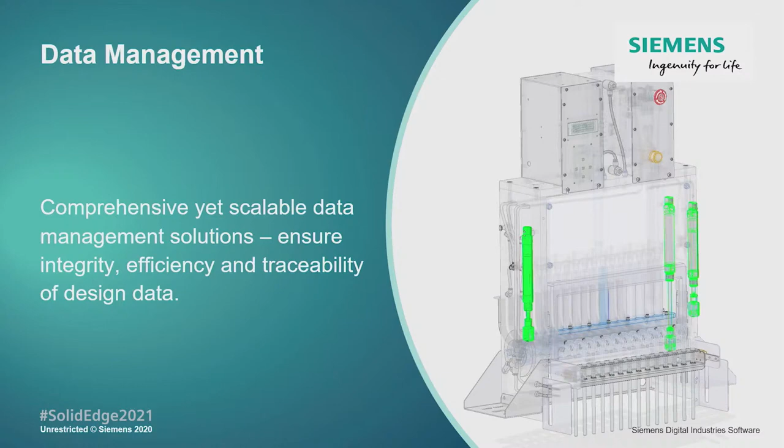Let's jump back into Solid Edge and kick off with the new concept modeling workflow using this popsicle mold. The concept workspace is a space where a designer can explore new ideas without committing the files to Teamcenter. Think of it as a sandbox where you have the freedom to make any changes to a design without compromising the existing models. Here we're going to create 2 concepts of our design.

We can then explore our first concept for a new mold retaining mechanism by removing some of the existing components, then making some changes to the mold plate, deleting features, as well as adding some new ones.

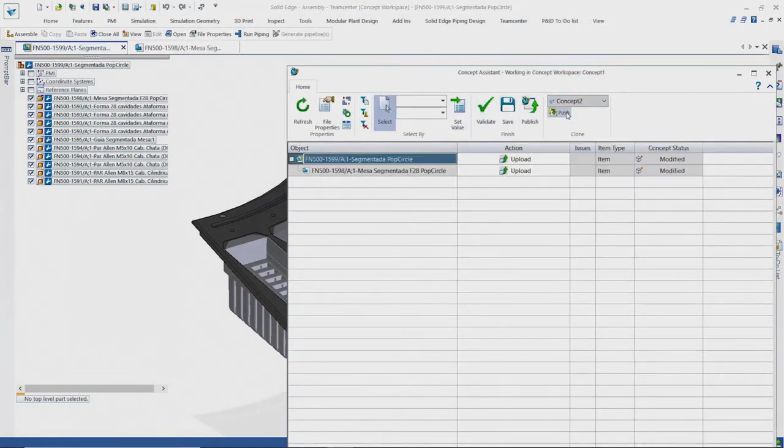Using this first concept as a starting point, we can go ahead and create another one which can be explored later. The designer has the freedom to create as many concepts as desired. With concept 1 still the focus, we can add the appropriate mold retaining components to finish the first assembly concept.

Going back to the concept assistant, we can switch to concept 2 and open the design data. Here what we're going to do is assemble the different mold retaining components for this idea.

Once the concepts are finalised, the data can then be sent to Teamcenter. The concept assistant helps with this process and provides options to filter for new or modified components or even revert any changes made. The 3D compare tool allows a quick visual check on the changes between the concept and the server versions, and the user has full control over the actions for any modified components.

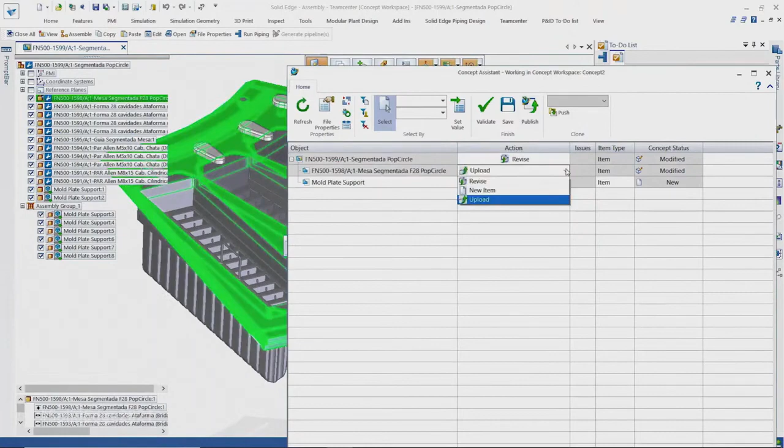Once everything is defined, the data from the desired concept is seamlessly sent back to Teamcenter.

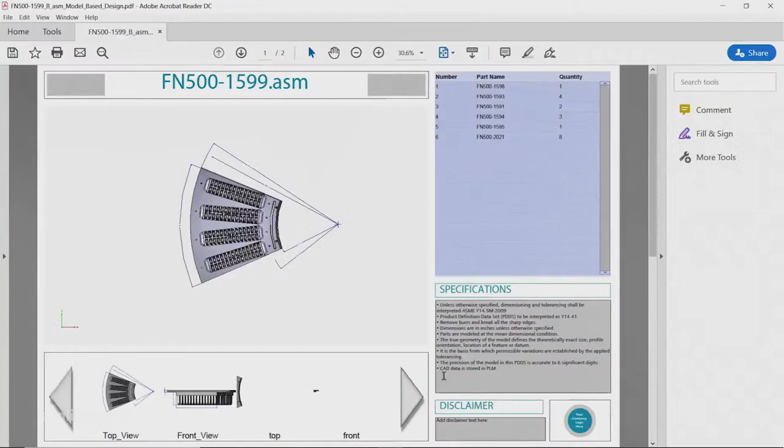Also new for Solid Edge 2021 is integration of Solid Edge's model-based definition content. Now all the downstream manufacturing information, including the MBD PDF output, is automatically captured by Teamcenter and visible within the item revision of the part or assembly.

Moving over to Solid Edge's built-in data management, a new Open As command allows users to control exactly how a file is opened from either Windows Explorer or from the most recently used menu. This allows full control over how an assembly is opened, such as defining the correct configuration, setting read-only status, applying large assembly options, and much more.

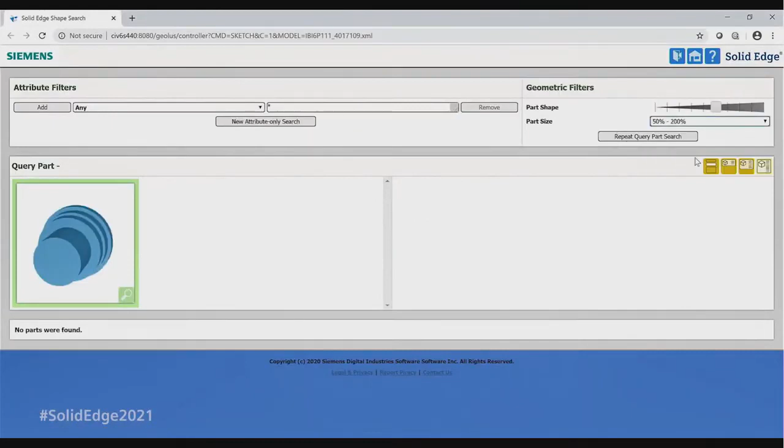A new shape search capability allows designers to more effectively reuse existing models and prevent recreating designs from scratch. You can simply use an existing part or even model a basic representation as a basis of shape search. Solid Edge then scans the available database for similar looking parts, and filters are available to approximate the match criteria.

Shape search results are compared with the original part, and the accuracy of the size is displayed as a percentage value. Once the desired part is found, a single click opens it into Solid Edge and makes it ready for use in our design.

Cool, back to you, Dan. All right, thanks all.

So a lot of stuff to see there in data management. First up, shape search. New product for shape search that allows you to reuse the data you already have. There's nothing more inefficient than recreating something you have, but if you've got 100,000 parts or 1 million parts, how are you going to know? Well, the way you're going to know is through shape search, now available to everyone.

We've also enhanced Pack and Go, which is a very popular Solid Edge feature, allowing it to trace the links even outside the current context. And the Open As command is super handy. It may not be obvious what you use that for, but for example, if you want to open an assembly with a certain configuration, you can do that easily from File Manager and open it to a certain configuration. Good stuff for your everyday use.

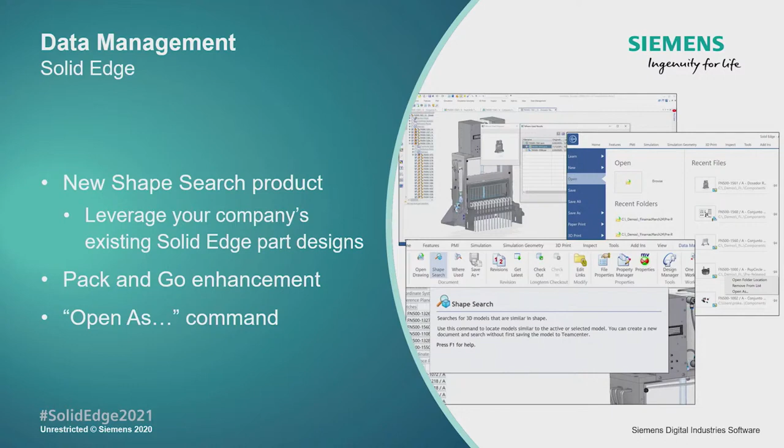On the side of Teamcenter, the concept modeler is really a great new technology. Being able to make changes and try out what-ifs without committing a part number, for example, and deciding whether it's a brand new part or a revision to an existing part.

Wire harness and alternate position assemblies are now visualized in the Teamcenter portal. And of course, the local component support—we added the local component support in Solid Edge, fully integrated into Teamcenter as well.

Next up is cloud-based collaboration. More and more we see our customers around the world having to collaborate across their business in different locations, with customers or suppliers. And the cloud really enables this. Some great new capabilities for cloud-based collaboration. Let's take a look.

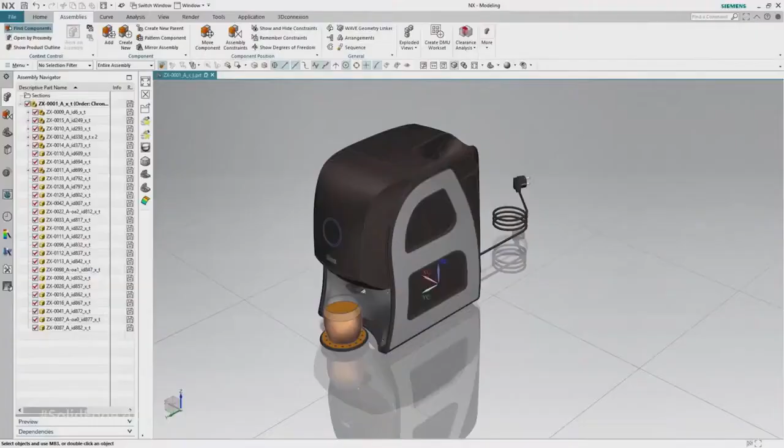Being cloud-based, browser-based means you can use this on any device, be it your phone, tablet or PC, and it also works with any common CAD file types. It's not just Solid Edge, it could be NX or other common file formats you might work with in your company. Being browser-based means it's instant on, and we improve that productivity with guidance. We've got a user-assisted guide that holds your hand each step of the way in using any of the capability in this app.

So here we're setting up a new project. It's guiding us to upload files into this project and into our cloud storage. We can do this two ways, either directly into the browser, or I'll show you desktop synchronization later on. This data could be PowerPoints, Words, or PDFs.

For CAD files, we've got an integrated 3D view environment. We can hide and show components with the tree on the right-hand side. There's other great tools here, such as Automatic Explode, so we can understand the assembly makeup, great for design and manufacturing reviews, and no pre-setup explode needs to be handled there.

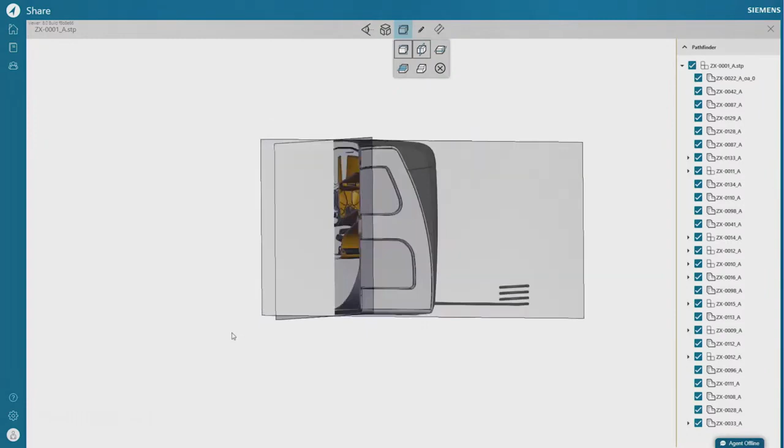It's also got great tools such as section views or cutaway tools, and if we want to take measurements on the fly, that's another tool here. Notice just how easy the interface is, it's what I call non-technical, so it's not just for design engineers' use. It could, for example, be used in a sales situation, nice and easy to get to any of the product features.

So here we're taking measurements on the fly, and we can also change the units on the fly too. In this interface, we can also add markups or commentary. There's some tools to do redlining, we can choose pre-selected shapes or just do freehand sketching over the top of the 3D model, and we can also include text annotations.

Any of these markups get recorded in the tree, and what's great about that is you can start to have a conversation back and forth on any of the issues that you're tracking, or maybe positive sales points about the product that you want to call out. It also records who made that markup and when it was made.

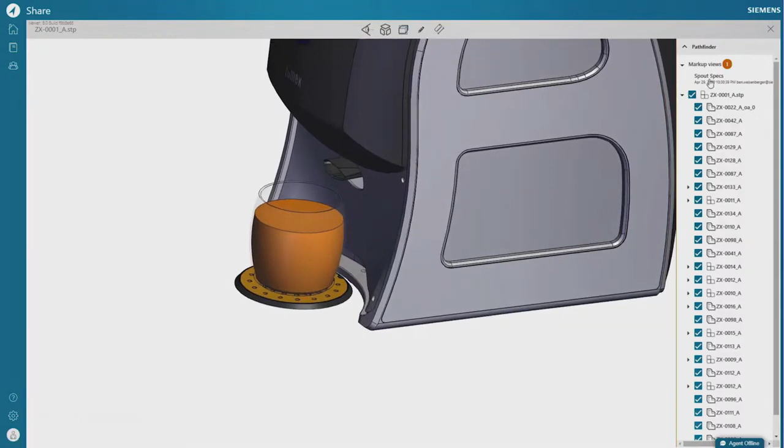So I talked about this other option of getting data into your cloud storage. We looked at upload into the browser. Also available is desktop synchronization. So this multi-CAD project we've got here, on our desktop, is represented simply as a folder. Any data we bring into this multi-CAD folder, either we drag and drop in or just save in, for example, from Solid Edge. This will get synchronized in the background as you work into this app.

Importantly, another great capability in this app is sharing with whoever you like, and it's nice and easy. Just simply type in the email address of the person you want to share with. You can choose the access permission or access level that you want to grant. For example, here we could just choose view or view and download. You can protect your intellectual property here.

And then finally, augmented reality. This will take the 3D CAD model, superimpose it onto the physical environment, snap it onto any surfaces seen through the camera lens, to scale by the way, and then finger gestures can be used to manipulate that model. So here this orange juicer really was that large, and that's a great use of augmented reality to get that immediate design feedback.

Back to you, Dan. All right, some great new stuff there. Cloud-based collaboration. Again, your organization has expanded, you have people in different locations, you have customers, suppliers, pulling that all together through this new cloud-based collaboration app.